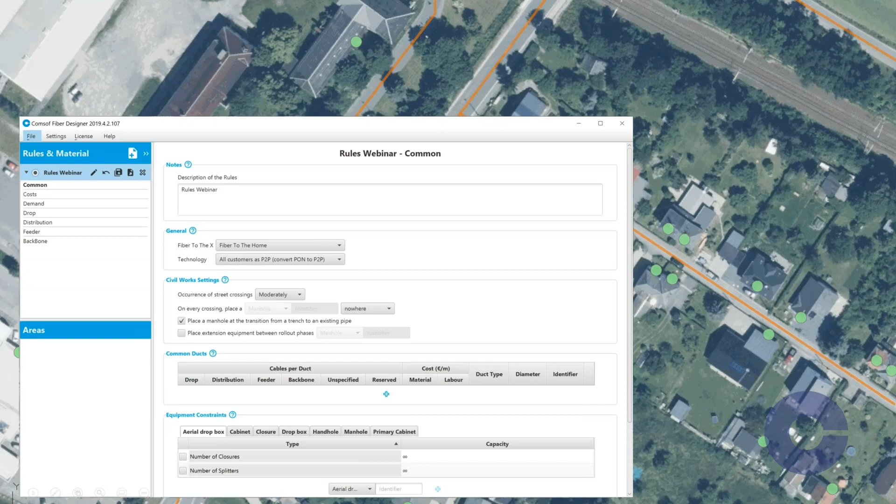Then, secondly, you need to set up your design rules. So with the software, you configure the architecture that you want to use. You specify the material, the civil works, and enter the cost for material and labor as well. Out of the box, we offer a wide variety of configuration settings. This is all based on the experience in over 200 projects worldwide, and we keep extending the functionality here.

I'm not going to go in detail here in the rules now. In the demo, we will highlight a couple of settings of the design rules. If you have specific questions about architecture that we support or how the rules work, you can always ask a question via the GoToWebinar window or contact us to follow up one-on-one later.

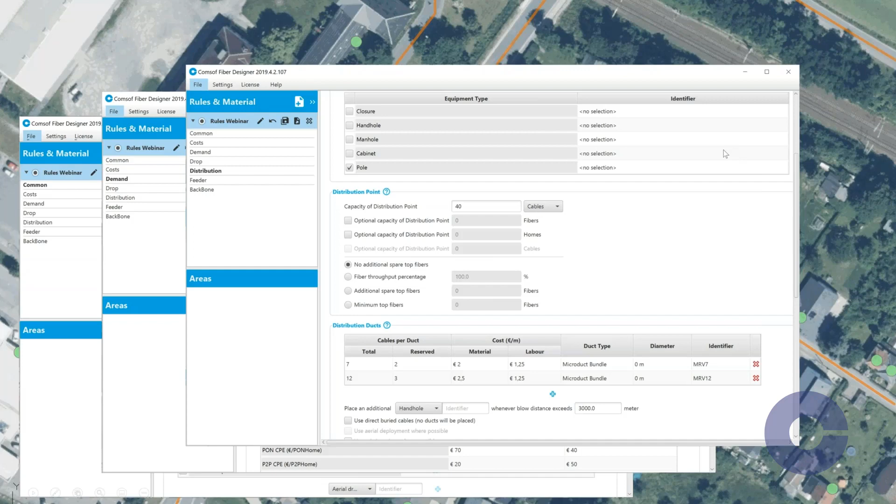What's useful about the design rules, of course, is that you set this up only once and you can reuse this same configuration for every project that you do that is using the same design rules, same architecture. Now, based on the architecture provided, the software will determine how to route the cables in your project area. Then the user, like Thomas said, can then go in and make changes based on field survey input, change routes, change structure locations. All of that is supported.

Now, the software, of course, is working cost-driven, so it's using the cost information that you provide in the design rules to come up with cost-effective, cheapest routes to connect all of the homes. While doing so, it takes into account the reuse of existing infrastructure and the cost tied to doing new trenches versus reusing that infrastructure.

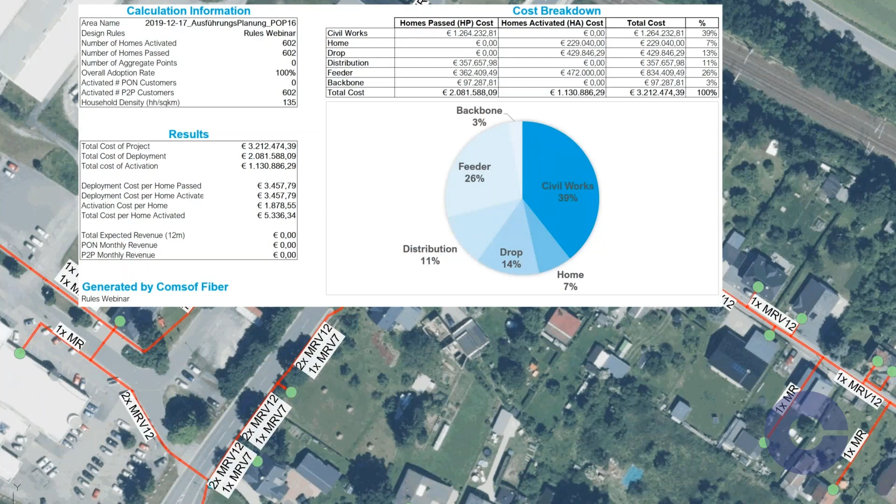The software will also automatically determine which cables to use, which ducts to use, where to place all of them, and where to aggregate the fibers in a cabinet or a manhole. What you see here, the labels indicate which ducts are used on each segment of the network. Then what will also automatically be calculated is a bill of material. And there we provide you a detailed breakdown of all the equipment, all the civil works that are needed to actually roll out the network, which gives you a high level of confidence also already in the strategic planning stage.

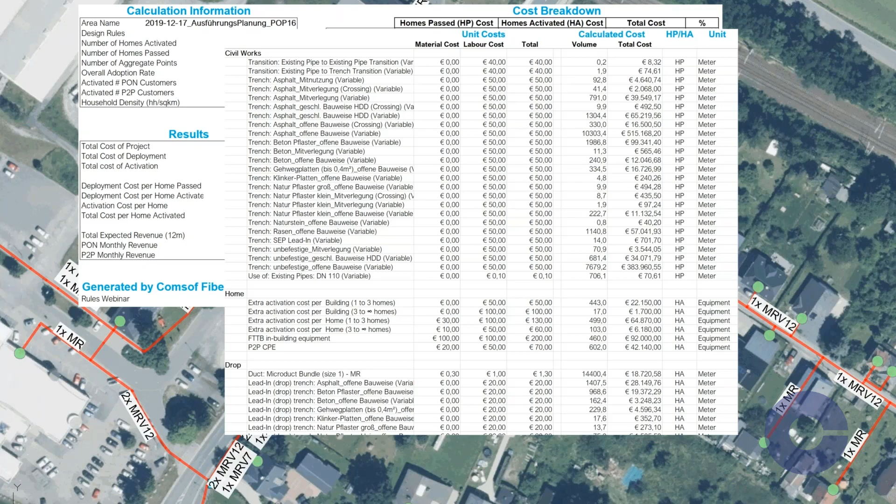So then the next step would be to create the to-build plans. So the construction documents, the splice and blowing lists and the like. So everything that the field teams need to efficiently build a consistent network, consistent infrastructure. Again, you start by setting up your rules, this time for those detailed design rules. This includes unique, meaningful identifiers for all objects in the network so that the construction teams can relate the objects that they see on the plans, and splicing rules as well. So detailed rules for how the splice closures and the ODFs should be equipped.

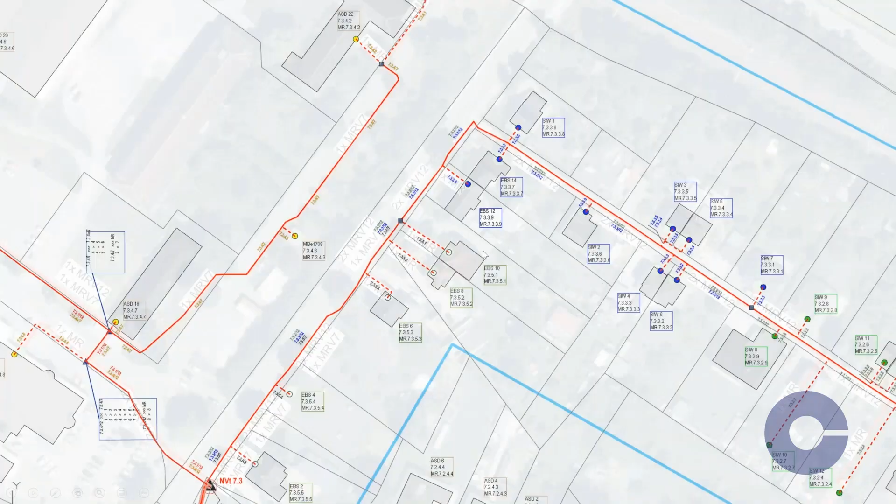The software will apply these rules to your design, and the result will look like this as an example. So we have here the same area, some identifiers that we can see on the distribution points and all the connections, and splice plans as well, just as an example.

During all stages of the rollout, our NetMobile solution ensures that the field teams and the back office workers always stay in sync. NetMobile is our mobile GIS client that serves field survey and photo documentation use cases. And now let's have a closer look at those procedures in the actual application.

So for our demo today, we brought a real-world project from the city of Plauen in Saxony, Germany. Plauen has about 65,000 inhabitants, and our project here is about bringing broadband internet to approximately 3,100 households that currently have less than 30 megabit per second, because that is the main condition of the German federal funding program.

In order to begin with the design, we first need to load our input data here using the import button, and I'm going to show you what we got here. So we have address points, we have some existing duct information and the possible trenches, so the options for the software to actually place our infrastructure.

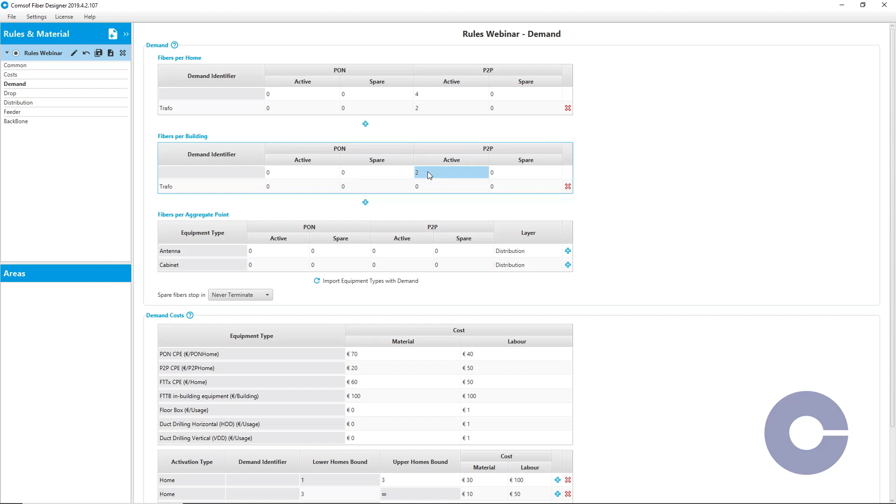On the distribution layer, we will notice that we'll use a direct cable to the building strategy. So from the DP, we will have individual connections, individual cables per each building. Our distribution point capacity will be 40 cables, and as is very common and very typical in Germany, we use microducts to bring the cables to the customers. So on the distribution layer, we work with 7-way and 12-way duct bundles, where we keep 2 microducts spare in the 7-way and 3 microducts as spare in the 12-way duct bundle. And this is again to comply with the rules of the funding program.

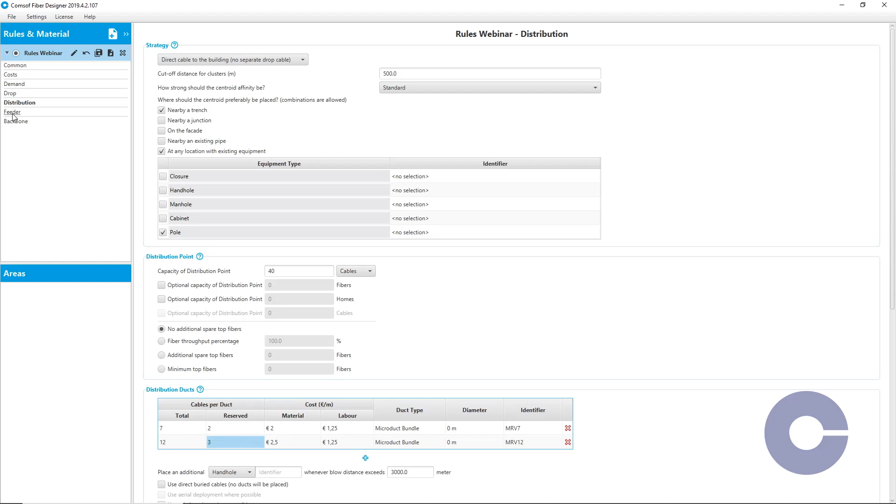We also have material and labor cost settings in here, and this is relevant for the software because the software will use these settings to decide on which duct to use per trench. So let's move over to the feeder layer. On the feeder layer, we also use a direct cable strategy. So again, individual feeder cables per distribution point. Of course, it would also be possible to daisy chain, so to connect multiple DPs with the same feeder cable, or it's also possible to have a ring protection planned by the software.

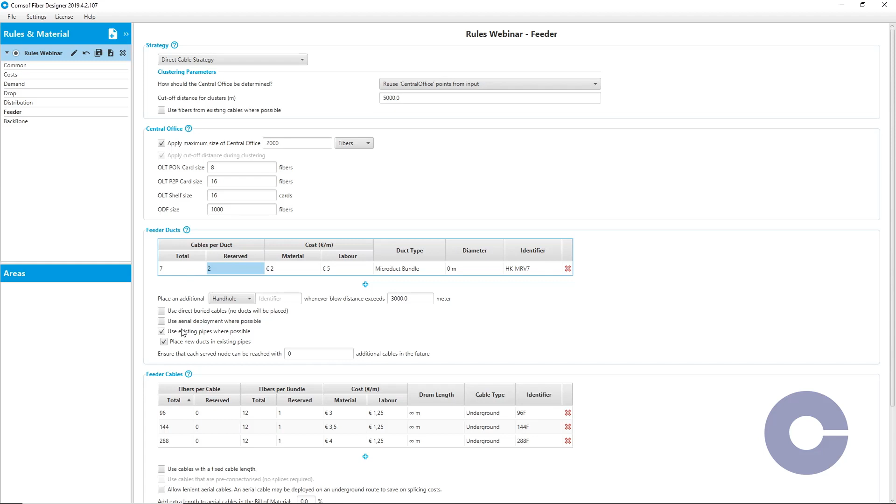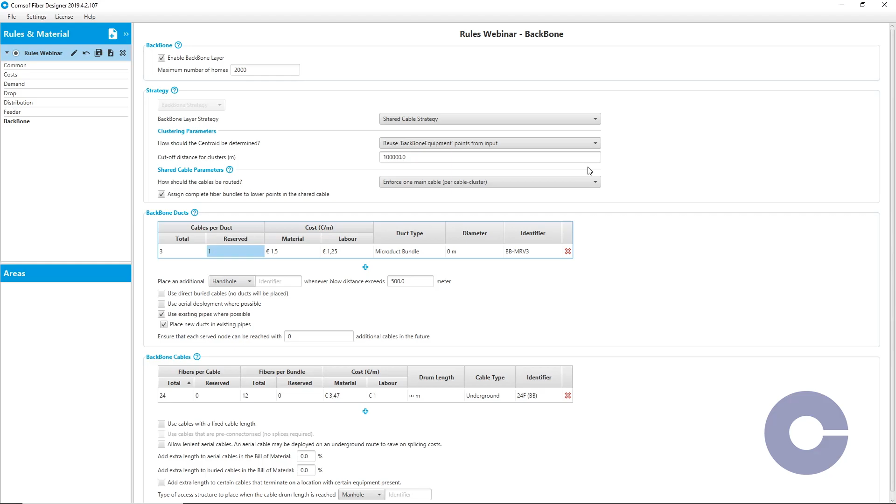On the feeder layer, we also work with microduct bundles. So here we have the 7-way again with our 2 spare microducts. And we have checked the use existing pipes where possible option, because for feeder we want to place the feeder ducts in our existing pipe. And in this project we also have a backbone layer, because we have multiple POP locations that we want to interconnect, and that's where the backbone layer comes into play. Again, using microducts, 3-way duct bundles with 1 spare microduct in this case, and we also want to use our existing pipe when possible.

So with the input data loaded and the design rules defined, we can start an actual calculation. So we will not focus on those buttons here, which are for data pre-processing, but our project is already in the field proof stage, so we could directly start a calculation. Takes about 2 to 3 minutes for this area. I'm gonna skip this and show you the results right away. So I'm switching over to another display map, and then we can zoom in and have a look. So the red lines now represent the trenches that the software has chosen, and we also get some annotations alongside telling us the type and the amount of ducts that the software has placed in there.

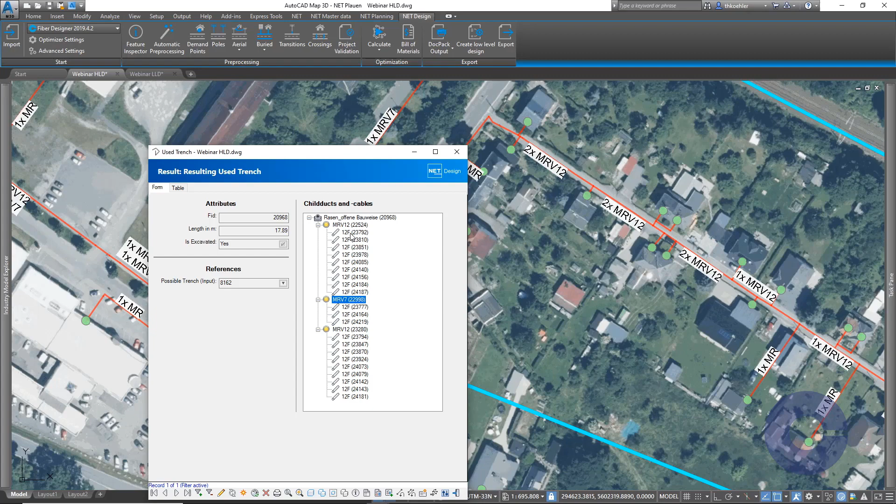And what we see here is a full topologically correct model of the network. It's not just a plan of some simple dumb lines. Everything's connected, everything is stored in a database, and what that means is we can again bring up the attribute form of a trench, of a connection, and see what's going on in there and see what is linked. So this trench that I now picked carries a 12-way duct bundle, another 12-way duct bundle down here, and a 7-way duct bundle, and we also got the cables inside of these duct bundles as part of the result.

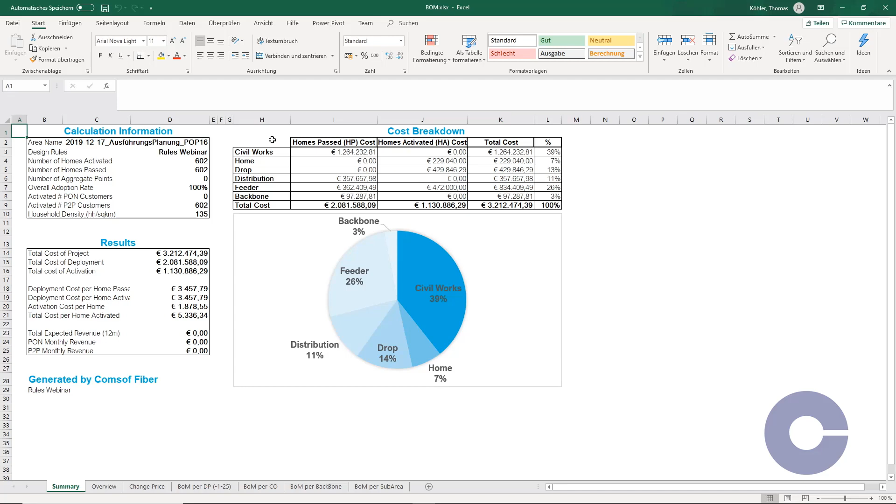So besides this full model of the network in a geographical representation, we also get a bill of materials in Excel format, which gives us a cost breakdown and overview of the area with the total cost per connection, as well as a detailed list of material and services according to our design rules, configuration and cost settings that we specified.

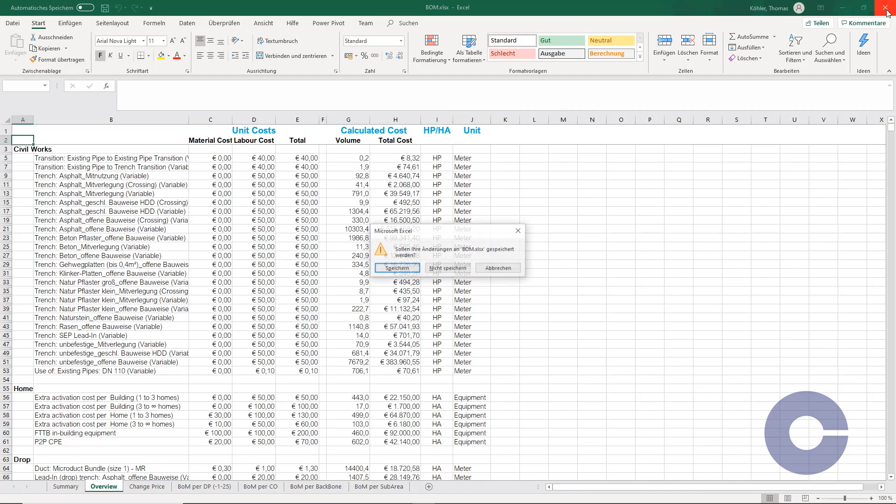Now, one important point that I want to make here is that we see our software as a tool to make the planner's job more efficient and allow the planner to focus on the critical design decisions, like where to place locations, where to place distribution points, where to place a POP, how to route cables, so which routes to take, how to aggregate addresses to a distribution point, decisions like this, instead of drawing lines day in, day out, like in a more traditional manual planning procedure.

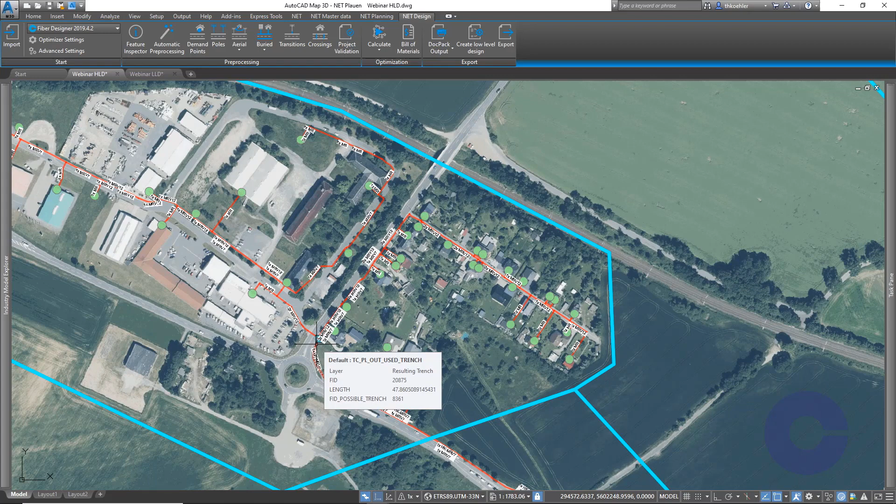And the sample that I had shown now is a simple scenario, but imagine you have to move the POP from one edge of the area to another edge, and the impact that would have on your design. Here you first hide the label to make it more clear. You pick the location and then move it accordingly. So now I picked the DP, so I would typically move it inside of the cluster, but the procedure works the same way for the POP. If required, you can move it to a completely different location, rerun the calculation, and the software would then do the dirty work for you.

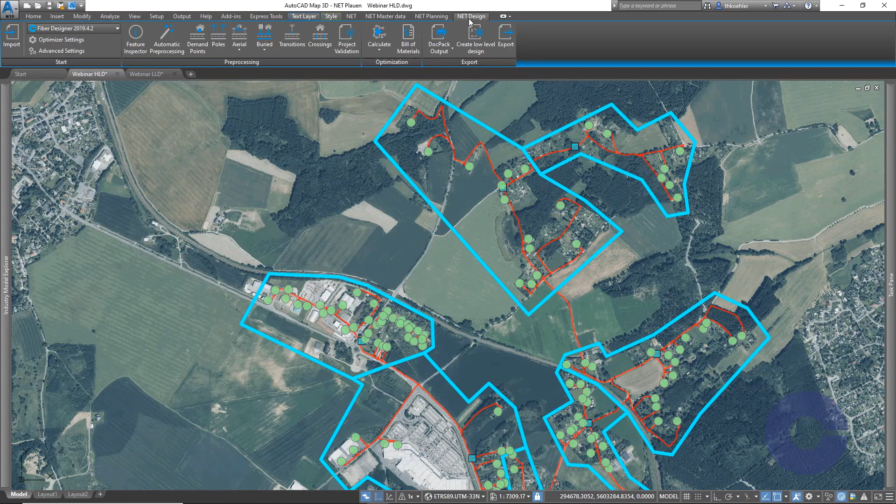And you, more importantly, get a new result in a matter of minutes compared to a matter of weeks before in the traditional planning process. So key takeaway here is our software is a tool to the planner, but the planner has the full control over the design.

So now we will go into field survey. We would verify the routes until we reach the field-proof design, and then we do a first handover to the public authority to apply for our funds. So we use the export button here, select the BMVI export, in this case for the German program, select the output directory, the version of the interface. Versions will evolve. That's an important lesson learned. We click export, and as a result we'll get a set of shapefiles, in this case, that we can take and upload to the website of the public authority. And then our project goes into the grant approval program.

And once we got the go that we can build the network, our next step would be to produce the to-build plans. For that, we use the Create Low-Level Design button here, where we select our field-proof design and the destination to-build target database, as well as our settings for splicing and naming, where we again have a lot of flexibility to cope with all kinds of different rules.

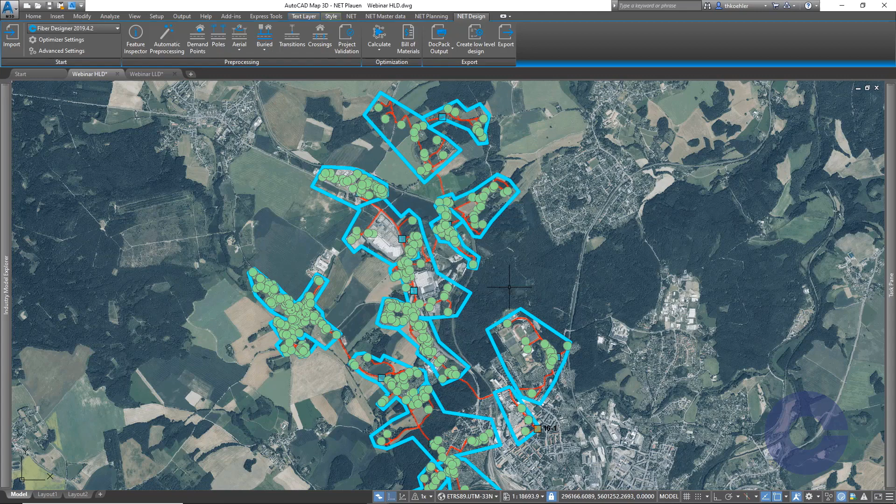So this procedure will again take 2-3 minutes. I'm gonna skip that and move right over to the results instead to show you what we will get from this transition.

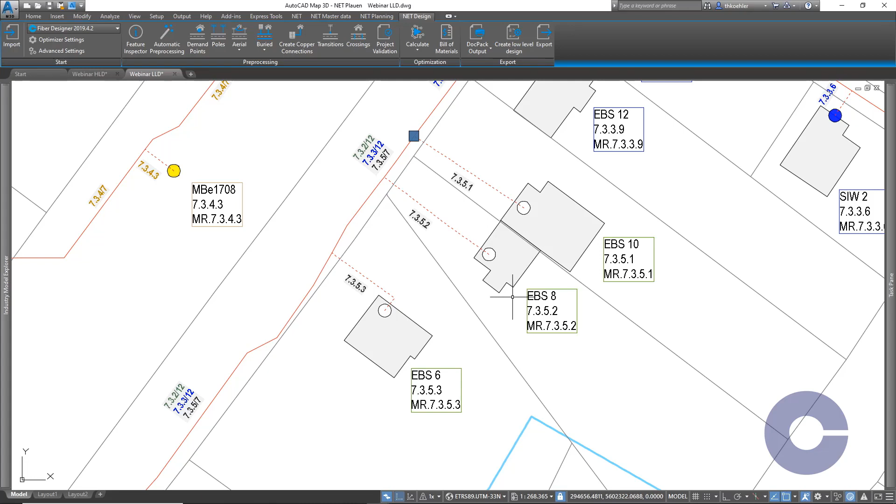Let's zoom in here to the same area again, and what we will see are unique identifiers per connection, unique identifiers per distribution point, as well as some color coding that has been applied, because in this particular project the duct bundles also get colors, so the outer sheath of the duct bundles will have a color, and that's represented here in those labels along the trenches. Also the labels of the actual connections represent the color of the duct bundle where this connection is fed from.

Besides those unique identifiers, we also got splicing information based on our rules that we specified. So when I select this DP here, we see that 220 splices have been created in 19 splice trays. And to get a more visual representation of that, I'm bringing up a schematic splice plan where we could then trace every individual fiber and see how it's connected.

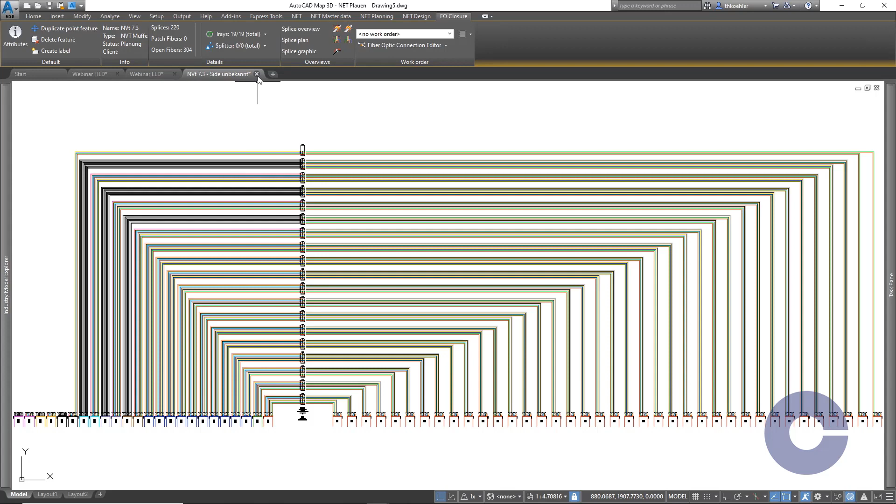This is handy for verification in the back office. The field teams, the splice technicians, would get tabular reports in the form of PDF files that we can also create with the software.

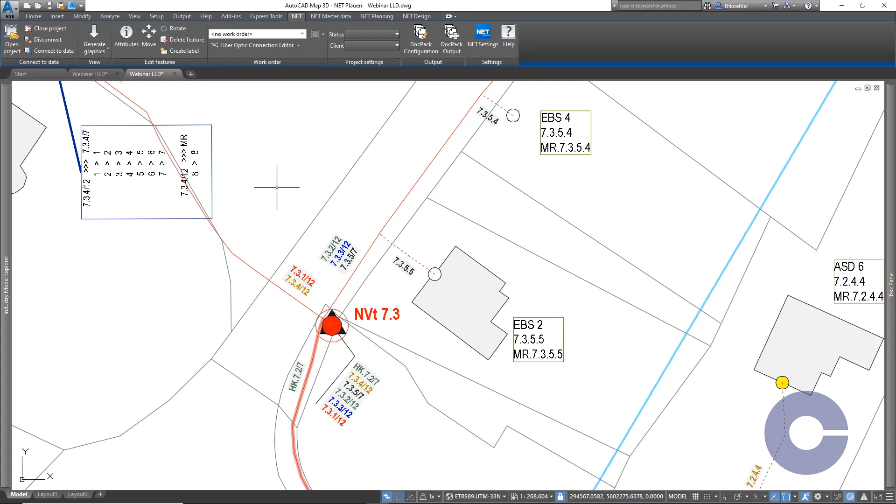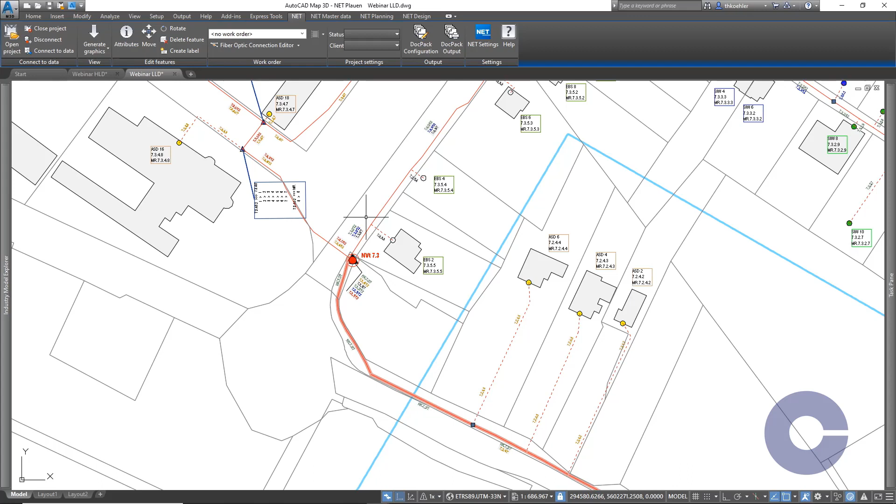Now, in an ideal world, we would just create all those construction documents, hand them out to the technicians, and be done. Unfortunately, we don't live in an ideal world. In many projects, we get last-minute changes, last-minute updates. Maybe there's some other construction work going on in the road, and we need to move to the other side of the road with our trench, or there are some additional connections that have been identified that we need to include in our design. And TKI Net has you covered for all these scenarios.

We provide a variety of different workflows, wizards, and functions for adding additional connections into an existing duct network, for creating splice records. All these kinds of tasks are covered in here.

By the way, don't worry about the German strings. It's a German project and our colleagues work with the German version of the software, but of course everything is fully localized and you can also get it in English.

So all these last-minute changes are incorporated into the design using the TKI Net workflows, and then we can finally create our output documents. For that, we have a feature that we call the doc pack. It consists of two pieces or two components, the configuration and the output.

So the idea behind it is that you do a one-time configuration of the types of documents that you want to deliver for every single project that you do. Typically this would be construction drawings, blowing lists, splice plans, and maybe others. So you configure that one time, and then for every instance of a project that you do, you just apply this configuration.

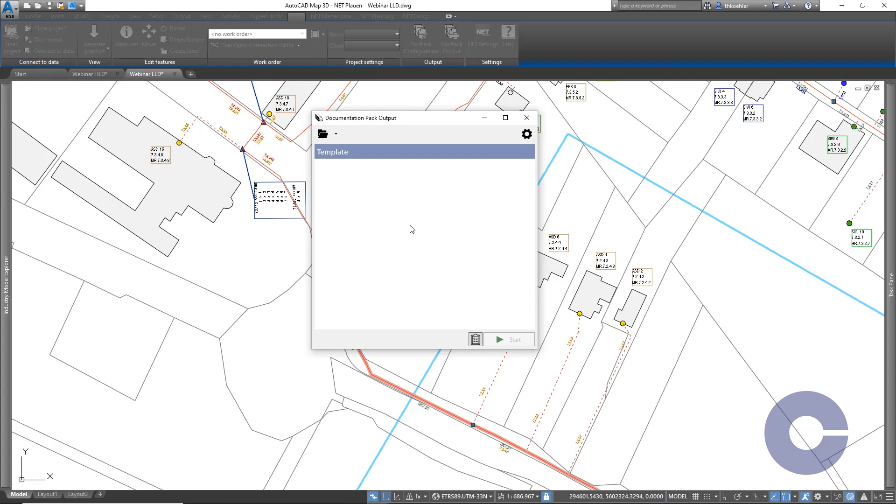So for this example here, we have defined 4 different types of outputs that we want to be created. We have an overview plot, we have the detailed plots, and then some splice reports and splice plans. So for this project, we will get that amount of files as mentioned here as PDF files. Next step would be to click Start, wait, and have all those PDF files be created for us.

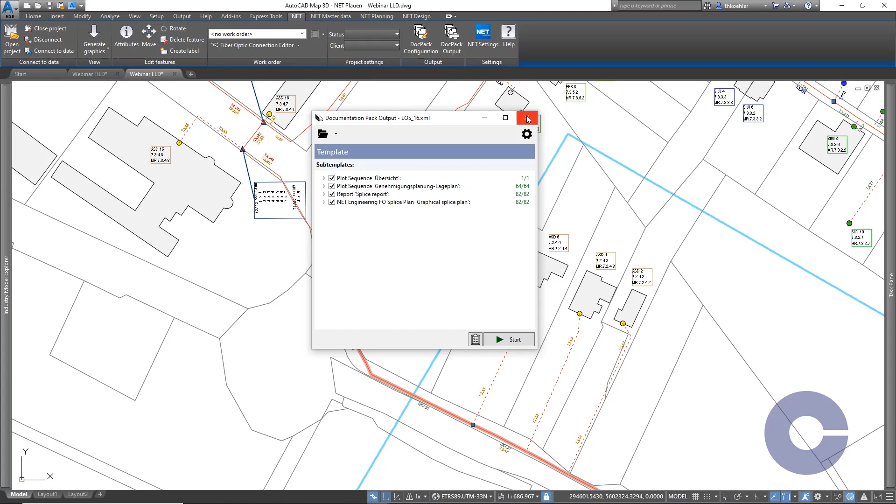Now I'm going to show you a few examples of this very project here in Plauen, what is used there. So some permission drawings, right-of-way drawings. You see all the sheets that have been created. Just one example - the permission drawing doesn't contain a lot of interesting stuff, just where we want to dig.

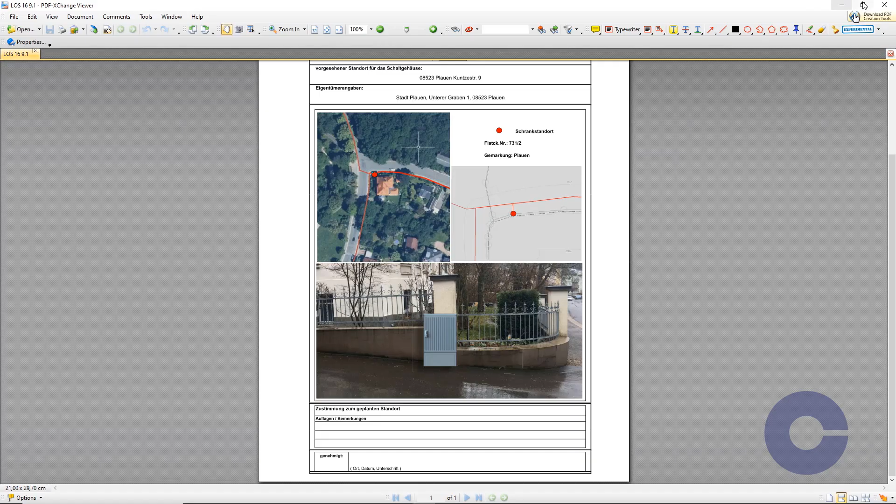We also got the cabinet location permission drawings, where we indicate where we want to place the cabinets, and then build plans like our construction drawings, which look very similar to what we had seen before on the screen. Again, detailed title block and legend in there explaining everything.

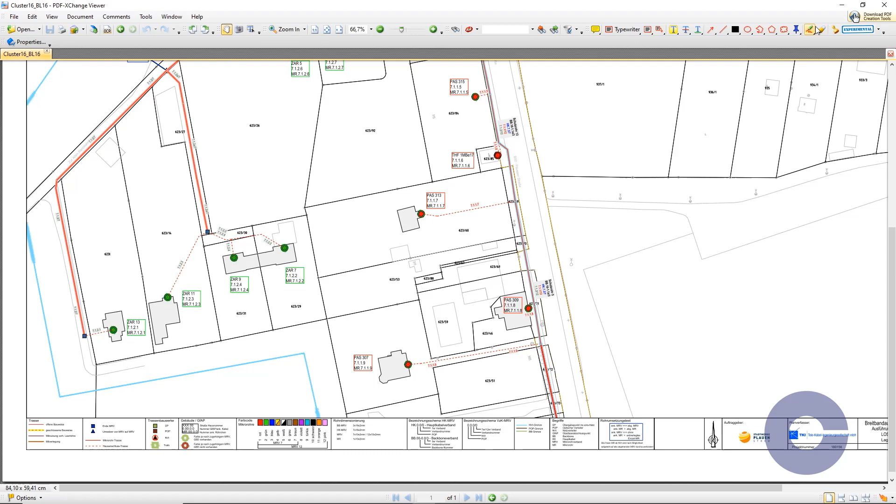Besides those construction plans, we have build lists, which contain duct blowing information, detailed information on where every duct leads, which building is connected by which duct, and also splicing information. So again, these are just some examples that the software can produce automatically. There's a variety of other schematics and reports, and there's also a report designer where you can customize reports according to your needs.

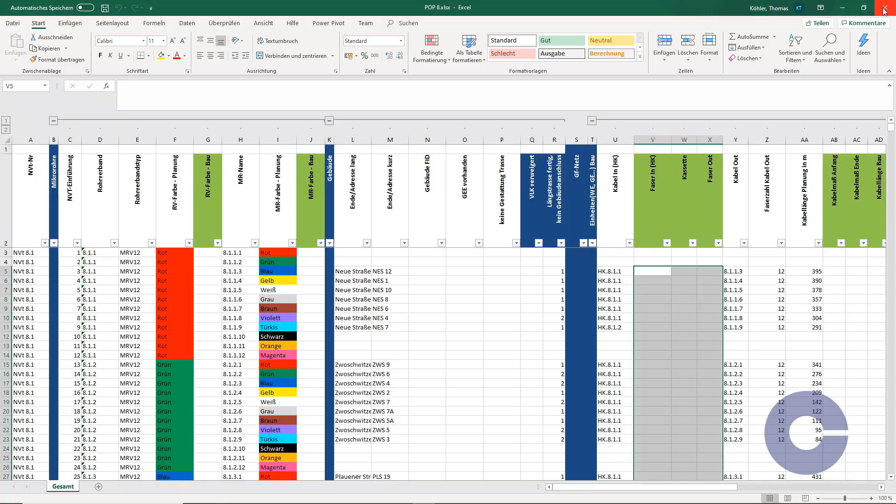So yeah, a lot of different outputs that we can produce to satisfy the needs of all the stakeholders of the project and to deliver meaningful and accurate information to the construction teams.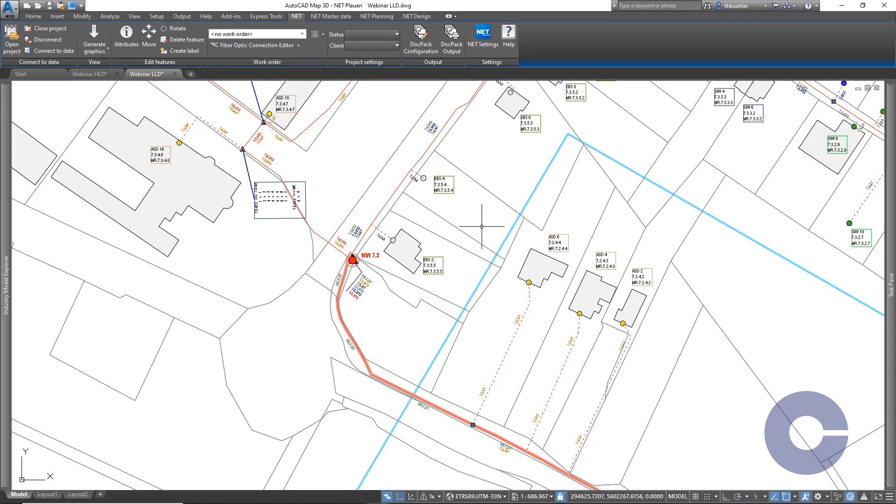Then in the actual construction phase, we will get as-built information back from the teams. Sometimes they might have made the connection a bit differently, maybe swapped the microduct order or swapped the fibers, and we can use the same workflows, the same wizards again, to incorporate all these as-built changes into our database. Once everything is done and properly documented, we would do a final handover to the public authority.

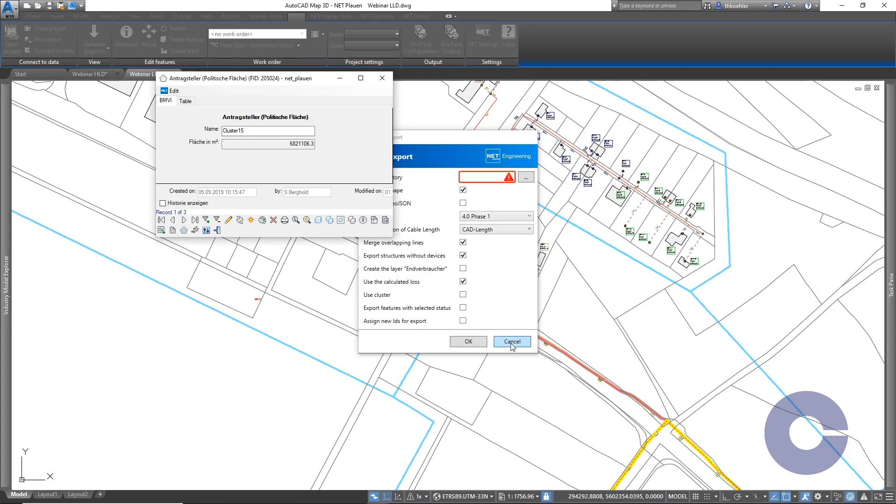And this time the dialog looks a bit extended. We have a few more options. We have more phases available because the level of detail we have in here is much more than before. So we do the final handover from this. And by the way, the level of detail is so accurate that you could use the same database and the same tool for the following operation of the network.

So fiber trace is possible. You can manage your outages. You can manage your services. It's all in there, and we'd be happy to show you more in a separate session. And with that, I would like to hand it back to Jonas for some closing remarks.

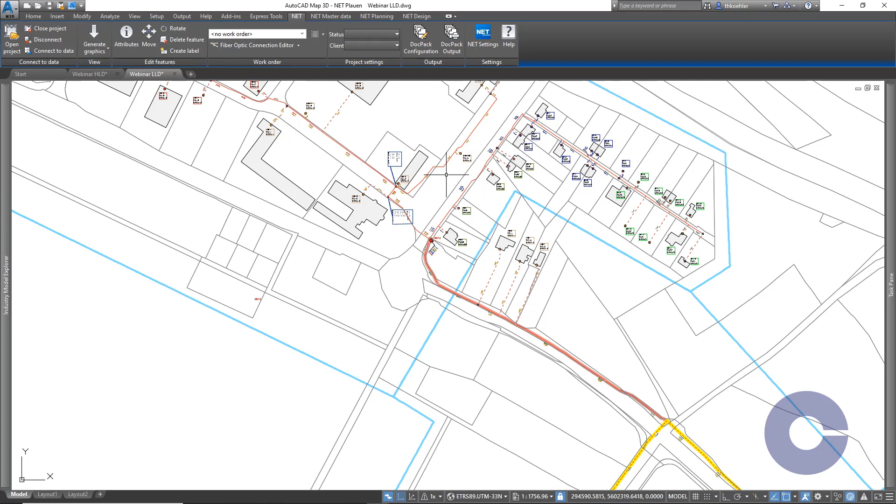Okay, so to wrap up this webinar, I want to just go over a couple of key takeaways that we want you to learn today. First of all, related to the European funding challenge.

Like we said in the presentation, there are certain rules and obligations that are tied to these programs. What you want is you want your tools to help you overcome these challenges, make your life easier. And what we wanted to show you today is that the joint solution of Comsof and TKI can help you comply with specific design rules, with the data formats that you need to deliver the designs in, any documentation requirements. So our tools can help you with these challenges.

Next, our solutions are completely integrated from planning up to build and documentation. So there's no manual handover of data between the different stages. By automating that handover, by integrating closely, you cannot make any mistakes. When Excels or files would be flying around from one division to the other, that's where a lot of mistakes can be made.